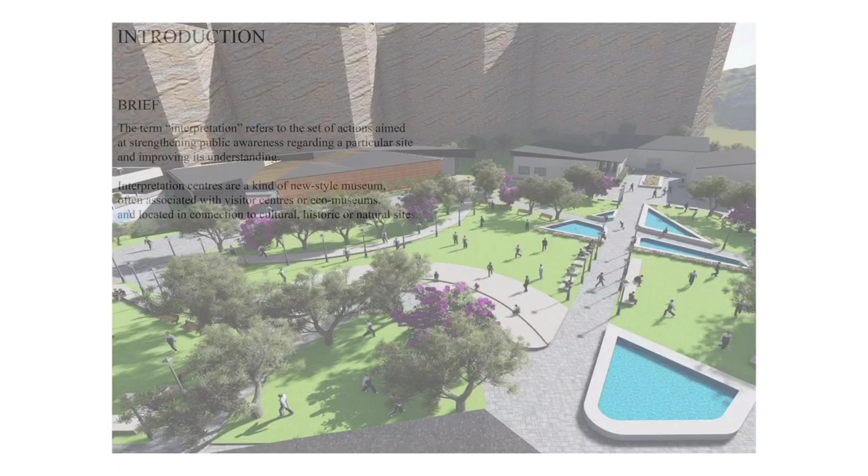Hello everyone, myself Nitya Dolu from 3rd year B.Arch, presenting my project, Interpretation Center.

The area is 1550 square meters and the location of the site is Portugal. The exhibition space refers to a bit of monumentality, referring us to the interior of the buildings.

Each of the volume ceilings interprets one of the roofs used in Romanesque architecture. The central space allows light invasion into the space, exploring the constant bright and dark relationship between it and the exhibition space. The central body is covered by glass, which is also used as the pathway on the upper floors.

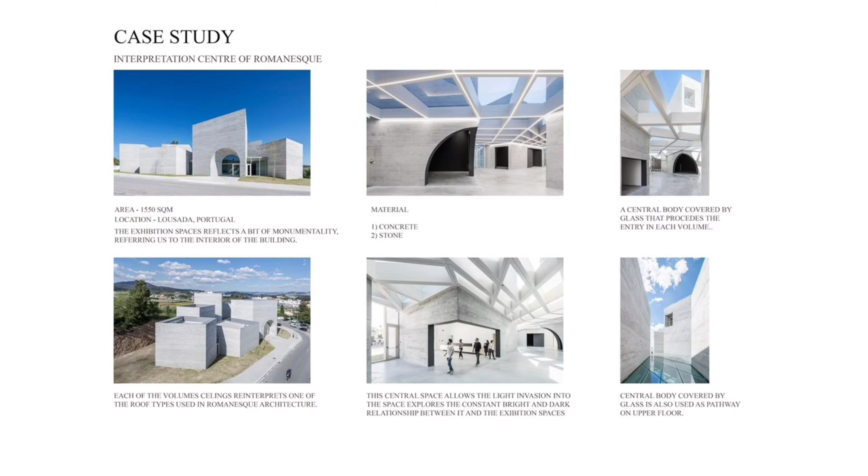The location of the site is near Pandavleni, and the above images are of the sites. The site is located in quarry, as shown in the site section.

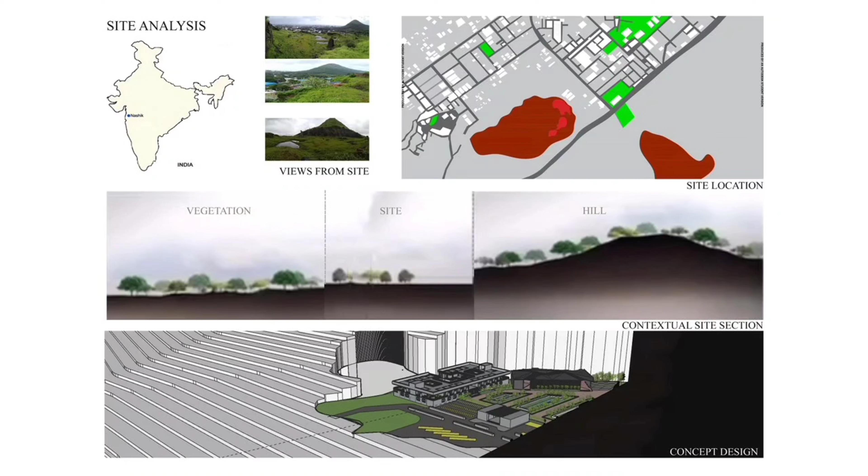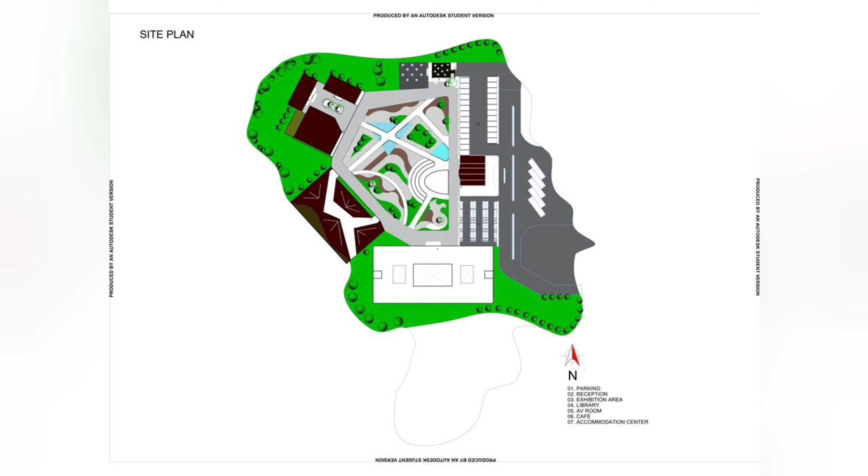Site plan. The main entrance is from east to west. The west side of the site has the quarry of 40-meter height, which I have used in the exhibition space, and there is a visual connection of Pandavleni caves to the north side of the site.

Entering the site, I have given two-wheeler parking near the reception. After the drop-off point, at the northeast side of the site, there is four-wheeler parking and bus parking. Reception is given near the drop-off point.

From reception, the path connects to the interpretation center, which is the exhibition space, leading to the library and audio-visual room. The accommodation center is placed at the bottom of the site so that privacy can be maintained in that area. The cafe is given at the north side of the site so that the viewer can enjoy the view of the northern side of the site.

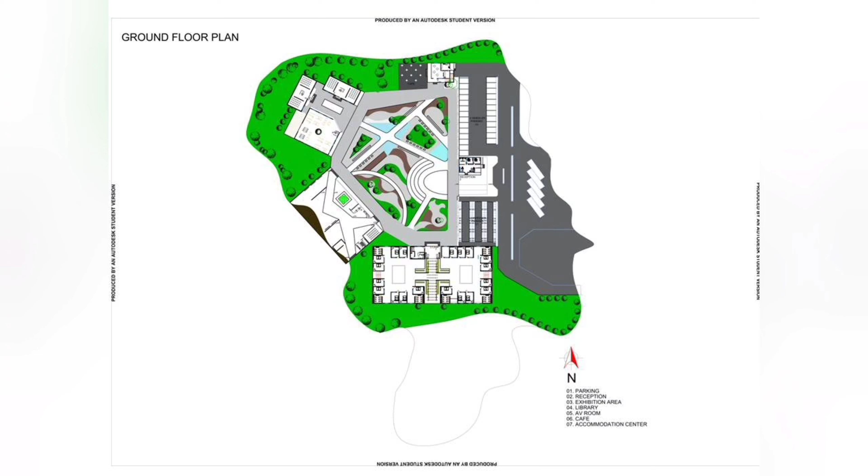The journey starts from the reception to the exhibition space and leads to the library, ending at the cafe area. The accommodation center has two-story height.

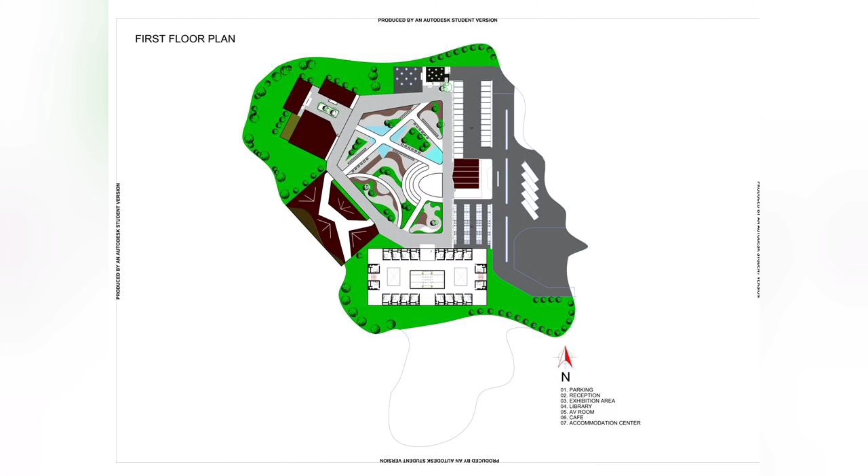Interpretation center. In the exhibition space, I have used the existing rock of the quarry. The idea is that the visitor can descend with the mountain. The central space allows light invasion into the space, exploring the constant bright and dark relation between the exhibition space.

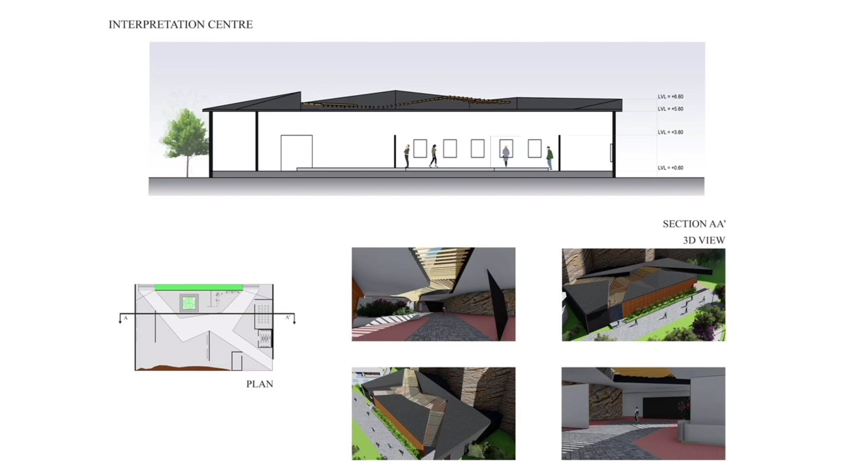Entering the museum, on the right hand side, there is a waiting area and the reception to the exhibition space, after which the visitor leads to the exhibition area.

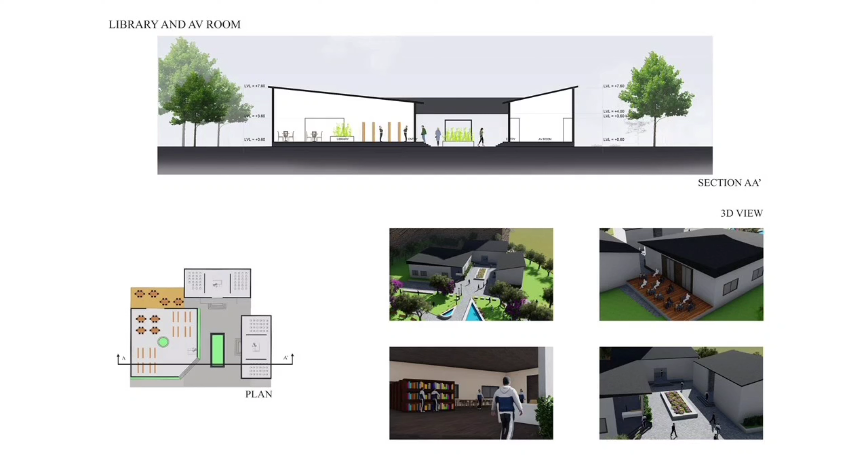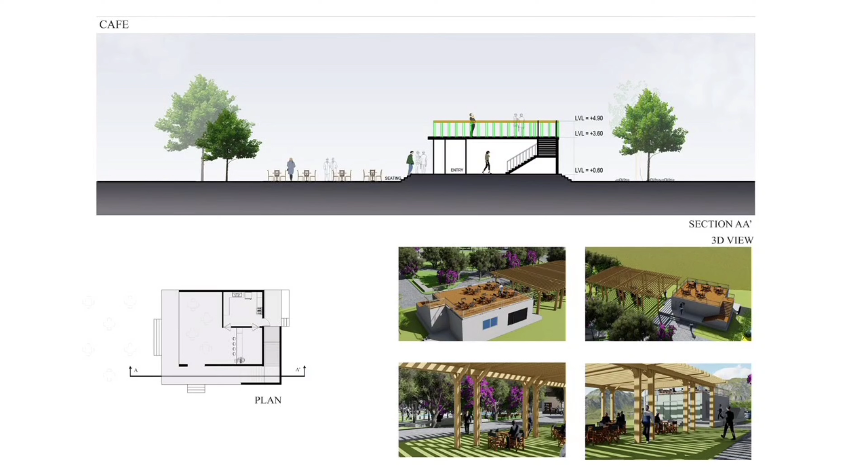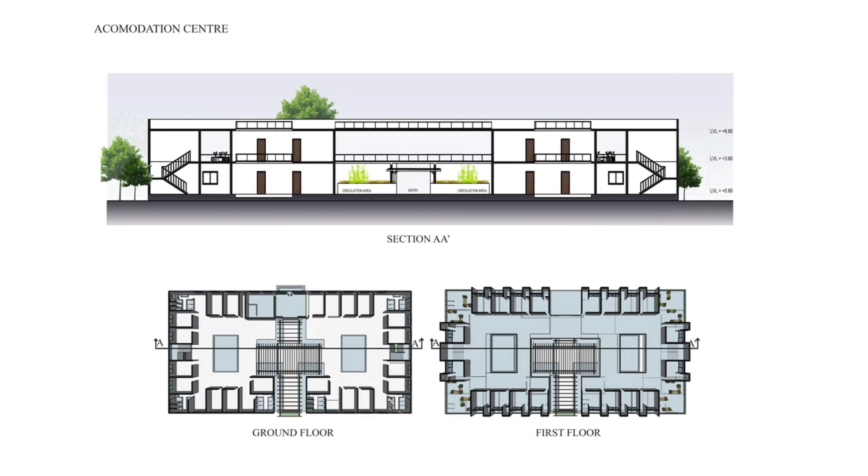These are the 3D views and the walkthrough of the project.